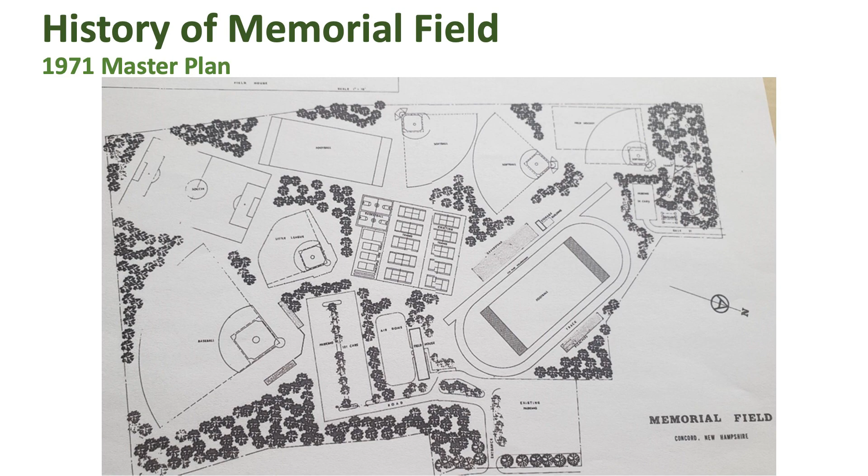In 1971, if you do the next slide, we did a master plan. Most of this master plan was started right after this, the city started acquiring some lots. The state gave us property, and we also got a land and water conservation grant to begin building out.

One thing I think is interesting to note, there's a parking lot down here where the band field is. There was a domed air bubble, pretty ahead of the game. Over here is a lacrosse field, but the track, baseball, some of the soccer and the football, different orientations, but a lot of it is there.

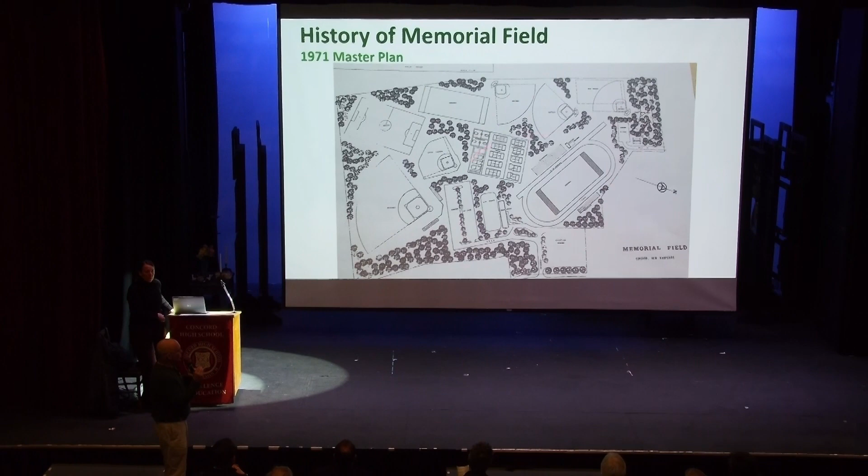So in 1971, they did a great job of planning ahead. I think we all know Memorial Field today. It is the main sporting location for Concord School District, for the high school. We do have a lot of youth and adult leagues that use it when the high school's not using it.

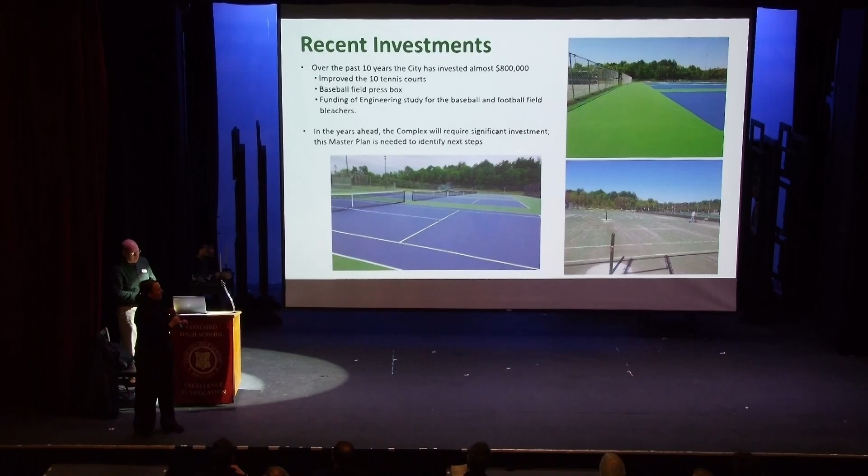So some of the things that we've done since 1971, it's aging. People born in '71 have already celebrated their 50th birthdays, so Memorial Field is pretty much ready for some upgrades. Some things that we have done is invested almost $800,000 to improve tennis courts, press box, and then doing some engineering studies to understand what the issues are out there and that need to be fixed.

Understanding through those studies that a lot more has to happen to bring this up to current standards. So that's why we're doing this master plan, to start planning out what we can do and what we need to pay for to do.

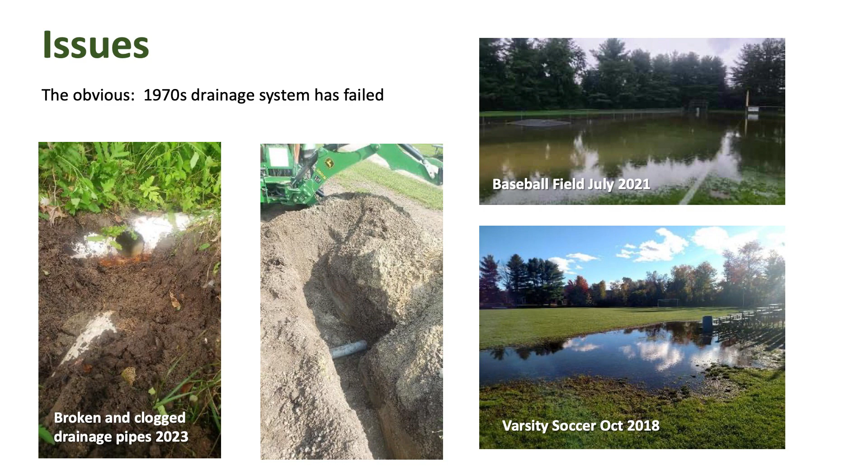So drainage, as David mentioned, is one of the biggest issues that we have out there. There's a lot of standing water, which makes the fields unusable. We've done some investigations just to look at the underground drainage, and they're clogged, they're blocked, they've been there for 50 years, so it's time to upgrade those to help address those issues. Next slide.

Yep, so just looking at the 1971 expansion, you can see this depression here, that's where those pipes are, and they're starting to collapse. So it's causing not only drainage issues, but trip hazards and other issues with the fields.

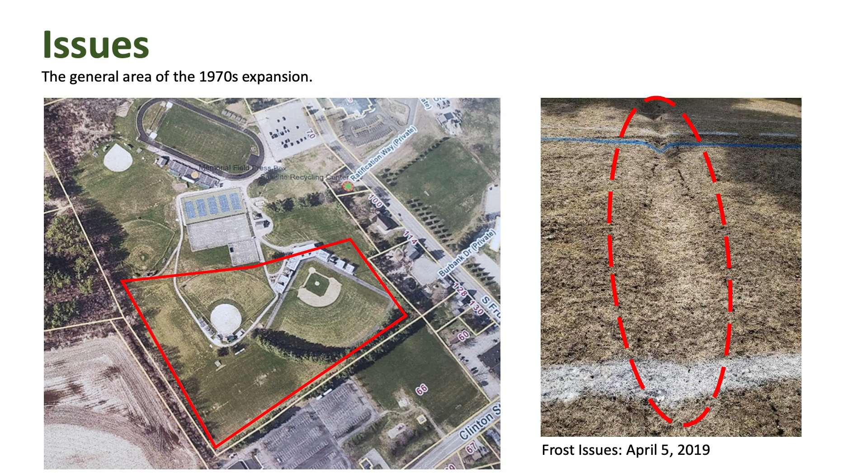So pretty much we've started, staff went through our understanding of what the issues are out there. The 1970s complex did not anticipate the needs of sports today. So that's one of the things we're trying to upgrade, to bring them up to regulation and to host different types of events that can't currently happen there. When the track is used for track meets, you can't have other games happening at the same time, so there's schedule conflicts. The track needs to be replaced, the bleachers need to be replaced. There's been talks about whether or not to make it an artificial turf field versus grass fields. There's parking challenges, there's accessibility challenges. So there's a lot of things that we need to address.

So the things we're focusing on as we move forward with the concept plans you'll see tonight are addressing those drainage issues, addressing parking, getting better lights out there that work, accessibility, bleachers, replacing the track, adding locker rooms and updated bathrooms, moving the fields outside the track for concurrent use, turf fields. We did not reach a consensus on that at the last meeting, so it's still out there as an option. And then adding walking trails and cross-country ski trails.

So this is not only from the public meeting that we had, but also there were focus groups hosted with high school students and middle school students.

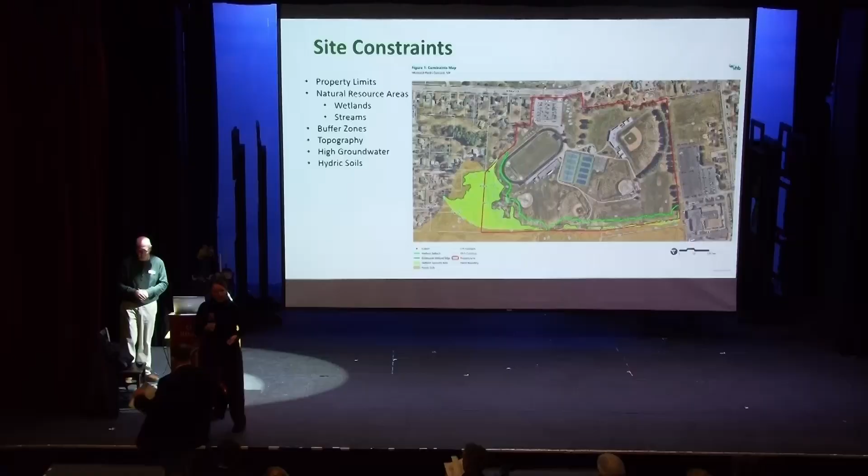So I'm gonna now pass it over to our consultants from VHB. We have Eric Girard here tonight, and he will bring you through their study.

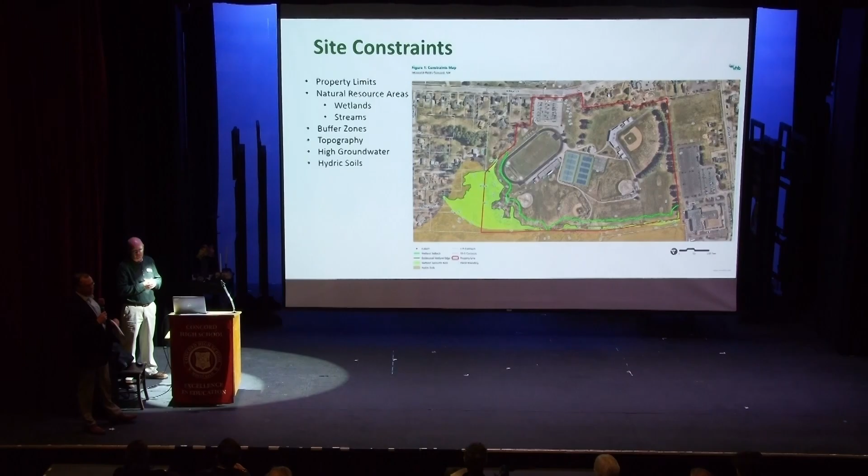Thank you, Beth. Thank you, David. My name is Eric Girard. I'm a civil engineer with VHB. And we've been working on this project essentially since July of 2023 to start our initial investigations to understand, really dig in and understand what's going on at Memorial Field.

So we started with an existing conditions site survey, understanding property bounds, knowing where the site limitations are, moving into identifying the wetland resources, identifying what those constraints will be, where we can or cannot expand or do work. Similarly, there's buffer zones and regulatory requirements associated with those areas.

Additionally, we engaged a geotechnical engineer to do borings to understand the soils, subsurface soils, and groundwater. Those results came back with very elevated levels of groundwater, 2-3 feet below the ground surface, which is why you're experiencing all these drainage issues out there. Additionally, topography - understanding the slope of the land and what we can and cannot do out there when looking at future development opportunities.

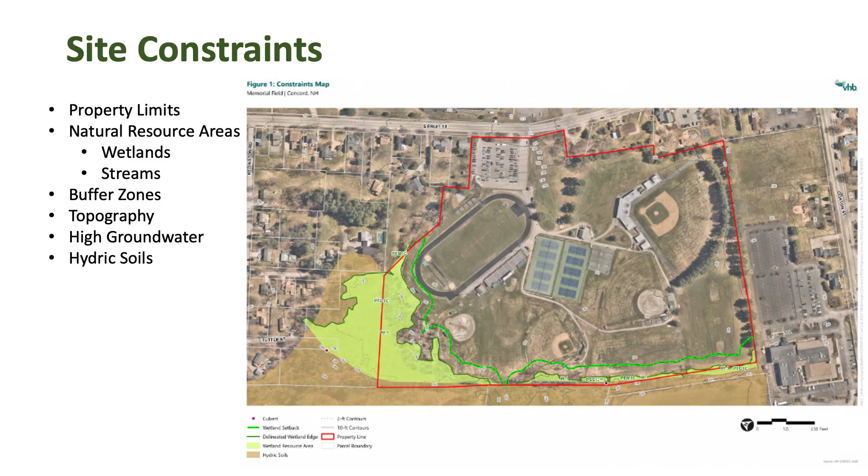And I'd like to turn it over to Chris now to run through the development programs. Thanks, Eric.

Good evening everybody, my name is Chris Huntress. I'm with Huntress Sports - we're landscape architects and planners. We specialize in the design and construction of recreation and athletic facilities.

So we were here for the listening session, and before I present the drawings that we're going to look over, this being one of them, I just want everyone to remember we're at the master plan level. What we're trying to show tonight and in the plans we've developed to date are really what's possible - have we thought of everything? Some things that we're going to show, I think, work quite well. Some things may need some additional thought. But what I want to take you through first is...

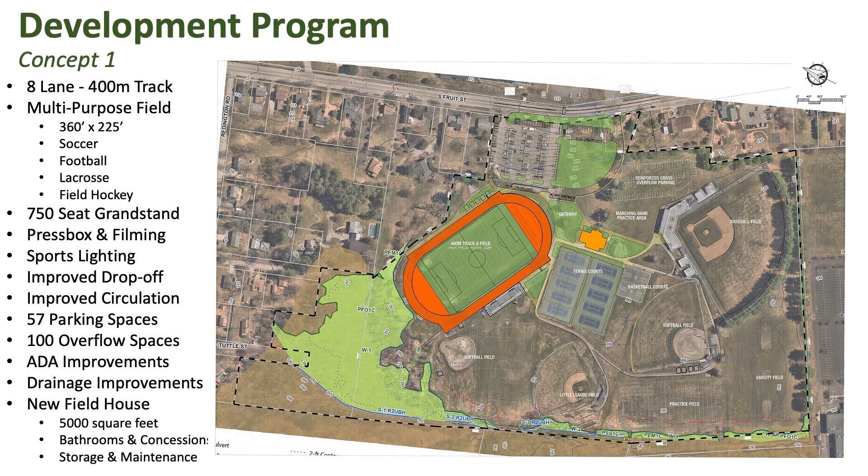You have that laser pointer - this is what we called Concept One development program. When we were here last time, we heard quite clearly that an 8-lane, 400-meter track would be desired, that the field within that track should be wide enough to accommodate multiple sports, not just football, but widen it out for a full-size soccer field, which once I get to soccer width at 75 yards, I can accommodate lacrosse, field hockey, every other sport within that dimension.

The seating could come down on the track and field, and things like a second field could be developed that wouldn't be within the track. So let me walk you through this program a little bit here.

What this plan shows - this is South Fruit Street up here, and this is your existing parking. We've expanded the existing parking to move westerly down towards the track, to put a bus drop-off in this area, and we've continued a new access road around this slope that would come out opposite Industrial Drive to improve the parking and circulation you've got up there now. This secondary entrance and exit is off-centered from the center line of Industrial Drive, and I think that doesn't allow this parking lot to be as efficient as it could be.

So we wanted to see if we could improve circulation and expand some of the parking. This new lot accommodates 57 more parking spaces than we have now. Again, we take this access drive and put it on the same center line as Industrial Drive. That allows for bus drop-off and pickup here, and also bus parking right up in this area too, so that when there are major events with multiple sports and multiple teams, there are places for them to go.

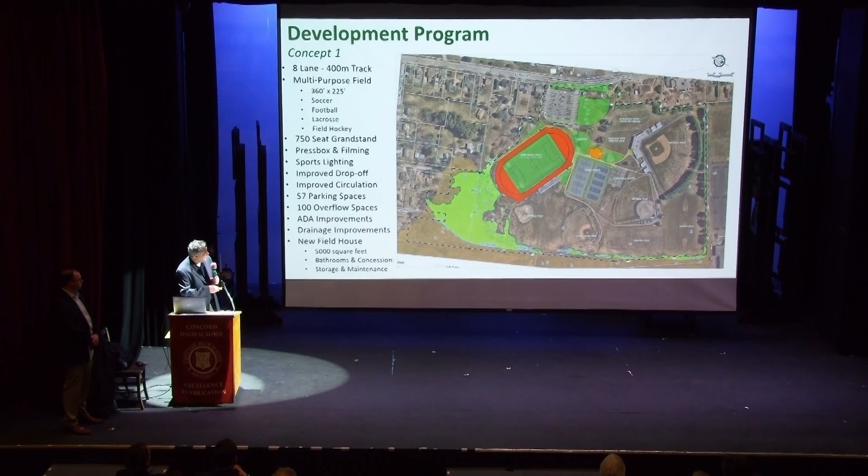The other desire we had, or were asked to accommodate, would be a new field house building - that's what this orange block is here, a 5,000 square foot building which would accommodate concessions, bathrooms, storage, and maintenance areas, and be a significantly larger building than what you have now. It would be in what I consider the central area of the park, so that it would serve not just the track and field, but all the baseball and all the surrounding facilities around that.

Let me see if I've left anything off here. I think on top of all this, as we did this design, we looked at things like ADA accessibility for handicapped individuals, and working with Eric and his team, drainage improvements and grading, and how it would blend into the site. So I'm very comfortable with the plan and the program we've got, that we can make that work.

We do have extra parking. Thank you, Dave. One of the other things we looked at was the possibility of expanding parking, understanding that parking on this site is tight. And as we saw in the original plan, there was a parking lot in this area.

We're showing reinforced grass parking over here, which would remain a grass field. It would be used by the marching band and could be used by anybody as a grass surface, but could also accommodate about 100 cars when there was an overflow or a need for it. That would roughly be within this area and stay off the baseball field as well.

So the access to that would be off of this new loop drive that would come in, and you'd come down here and into that location. I think the next slide is going to be yours, Eric.

Did I do the wrong one? Oh, there we go.

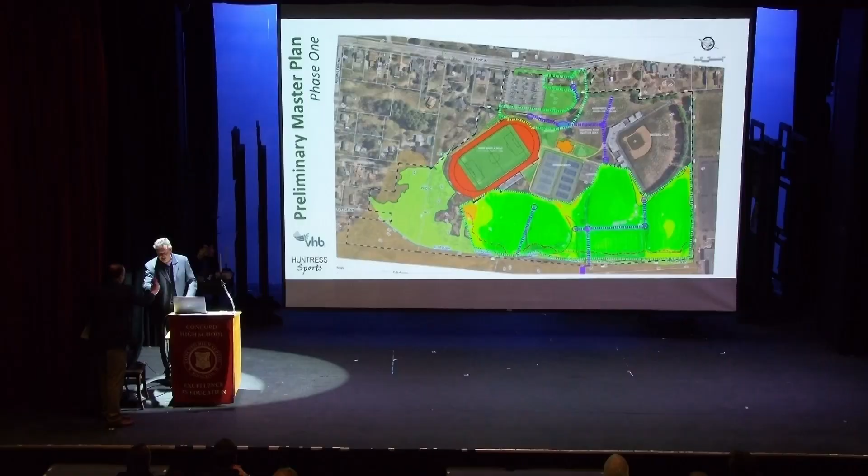Thank you. In looking at this Phase 1 program, understanding drainage and playability on these fields is a major concern. During these wet times, a lot of the fields become unusable, not very good to play on, and unsafe. As we look at how to improve drainage with the groundwater so high, those areas need to be lifted in grade.

We're looking at raising the grades up about 2 to 3 feet in those lower fields. That will allow us to get in a proper drainage system, under drains, connecting throughout. Those are the blue lines you see up there, a conceptual idea of where we'd be collecting some low points and ultimately draining out.

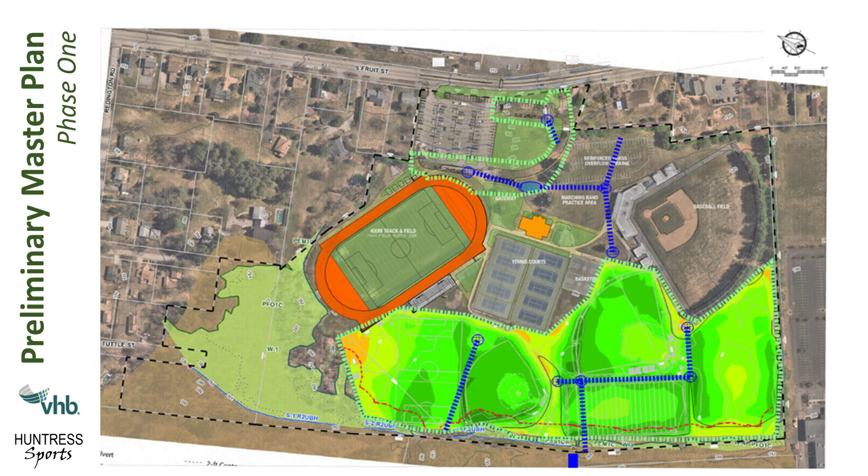There's the blue dot on the bottom here. There's a collapsed culvert out there today, so part of these improvements would be fixing that large culvert. It's on the state property, but we believe that area is also causing some of the flooding during larger storm events. The water just has nowhere to go, it's getting blocked by that. So opening that up will help, and raising these grades allows us to get in drainage as well as properly sloping the grade to surface drain as well.

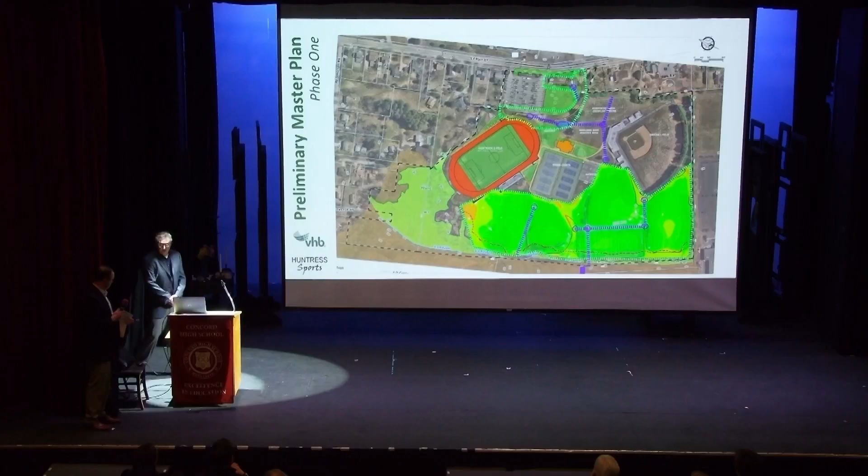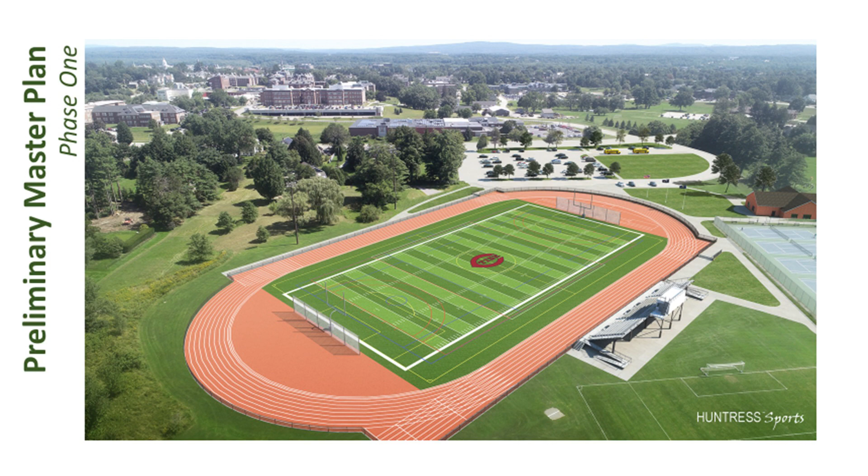The bleachers have been reduced in size to approximately 750 seats. Part of that is based on feedback we got last time about how many seats we really need, but the other part is the reality of expanding this track and field program without impinging upon the tennis courts and surrounding facilities. We cannot accommodate a 2,000 seat bleacher here the way you had presently, so we've brought this down to a size that best fits and would serve most needs, understanding there would be certain events that are a little bit larger.

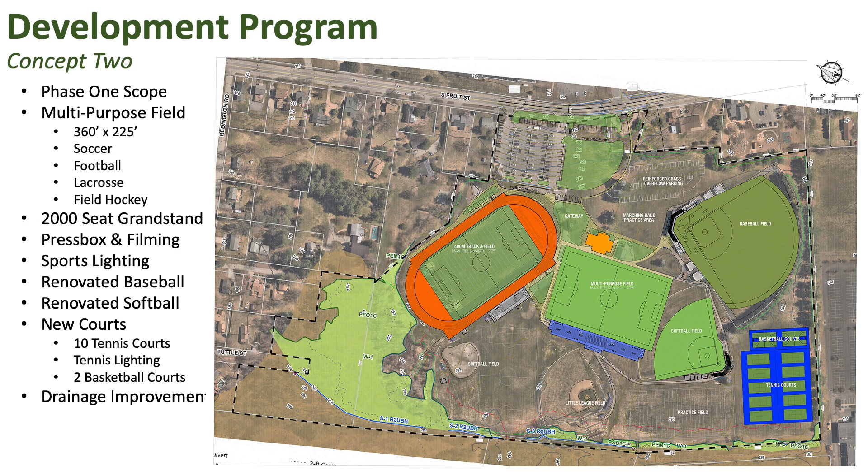This slide starts to look at some of the questions, some of the discussion about - so everything you see in Phase 1 that we talked about is accommodated here in this Concept 2 plan. The track and field, same size, the grandstands are the same size.

Really what we've done is take to heart the comment of, can we get a field that's not within the track and field, so you could separate some of the sports and opportunities for play and accommodate a larger grandstand. We did about 6 different versions of this plan to try and fit what would work. The only place that opportunity exists is in the center of the site, just to the west of the existing building, which is the location of your tennis courts. So we wanted to see what fit and what was possible here.

This shows a full-size multi-purpose field that would be large enough for any high school sport or even collegiate sport, full 75 yards across, 120 yards in length, with runoff areas and team areas, and a full 2,000-seat bleacher and press box here. This would be in close proximity to the new field house building, and really become the centerpiece of this facility.

It would likely be eligible for hosting major events, statewide events, certainly citywide events, but major events at a state level as well. As we start to look at how the other improvements blend into the rest of the park, the baseball field could be renovated in place with new bleachers in the back.

We have pulled the baseline in a little bit. You've got a rather large baseball field down there, particularly around the infield, so we pulled the infield in a little toward the bleachers. And we've pulled the right and left field foul lines in, because right now they're longer than they need to be, and expanded center field a little, so you've got now a traditionally sized baseball field in that same footprint as before, and that would be improved.

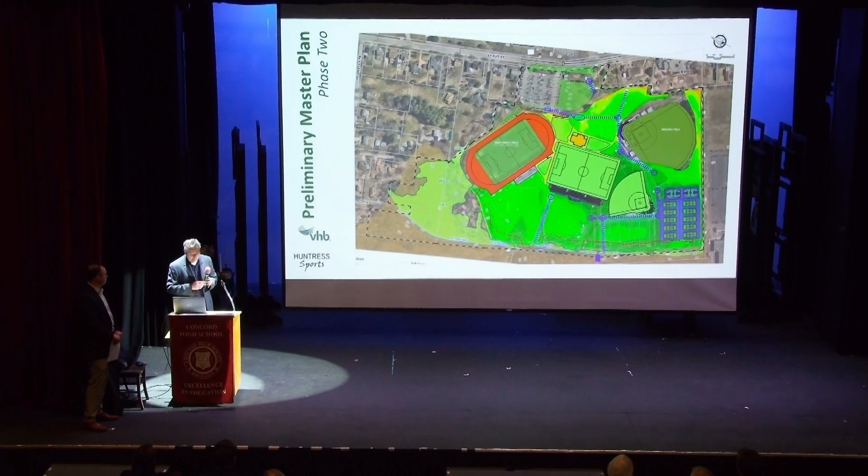This is very similar to the previous slide. Raising those lower grades 2 to 3 feet, drainage improvements, and as Chris mentioned, there's definitely more of an opportunity where we can look for more subsurface detention, even potential infiltration opportunities if we keep it shallow, which will help the playability of the lower fields and adequately get that water away. Overall similar improvements as before, same with the parking area, complying with regulations to detain and treat the water that will go through the state permitting process.

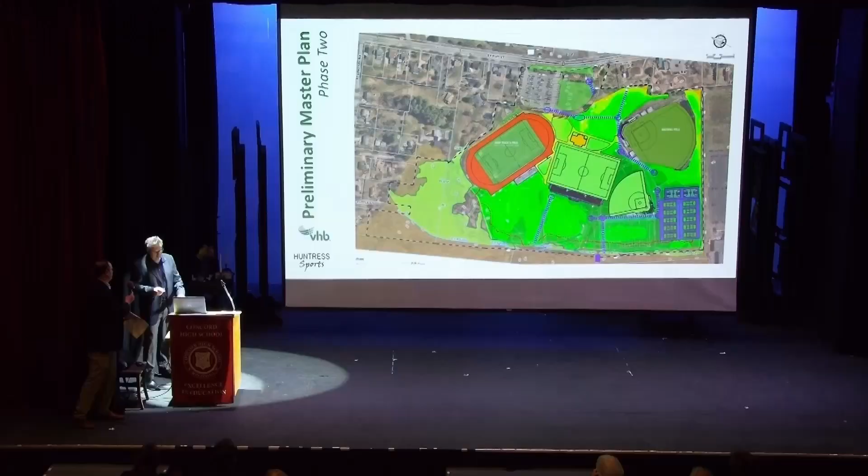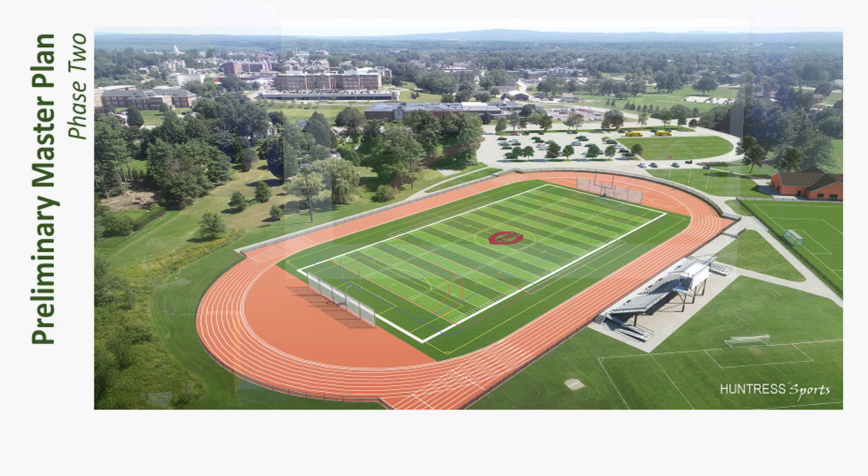This slide is very similar to the last one. The only real difference is that where the tennis courts were before, you can now see how the athletic field would be situated here. You can also start to get a glimpse of the new field house building up here at a gateway. As it would come in off the parking in your arrival, you'd be brought right into that centerpiece of the new facility.

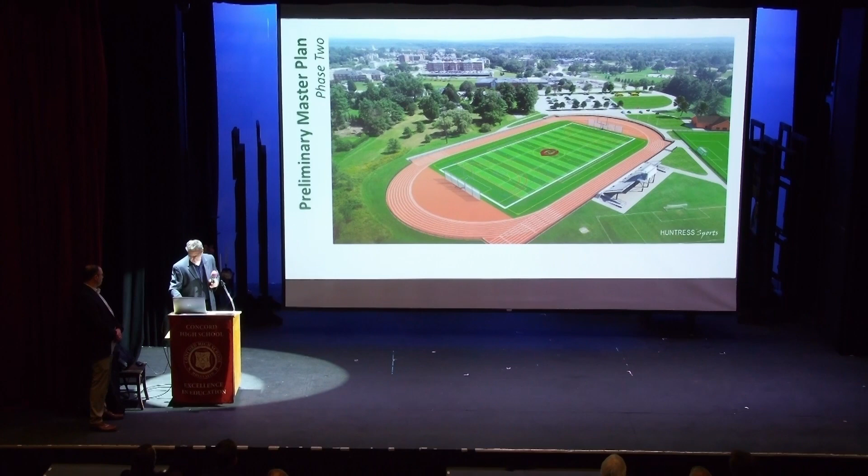And with that, we will open it up for discussion and questions.

Okay, are these on? I will let Beth and Dave call on folks, and Eric and I will answer the questions. What's that? That's okay. I know, it keeps rolling down. I'll pass it back to him.

For the 2,000 person bleachers on the new turf field that's not near the track, does it make sense to put the press box on the other side so the noise goes away from the neighborhood and heads out towards Langley, or is that not a concern? Or does it not fit? I'm sorry, you just want to move the press box or the whole bleacher? Well, I guess however the sound system would be, so that it would go towards that farmland. I don't live on that side, it doesn't bother me, but I don't know if it bothers the neighborhood with the sound coming out.

So it's a great question. Certainly the sound system is going to make some noise regardless of all the things we can do to it, but we can angle those speakers. Where the control happens, whether the press box is on the east side or the west side, is probably not as much an impact as how we angle those speakers and how many we turn on at a time. A facility like this, with the multi-purpose field in the middle, would probably have anywhere between 8 and 12 speakers oriented around the field in different areas. We could turn on one side and not the other, or turn on half of them. We could also put an upper limit on the volume so that if somebody's controlling it, they can't get over a certain decibel level. So those are all control things we could build into a sound system as we go forward.

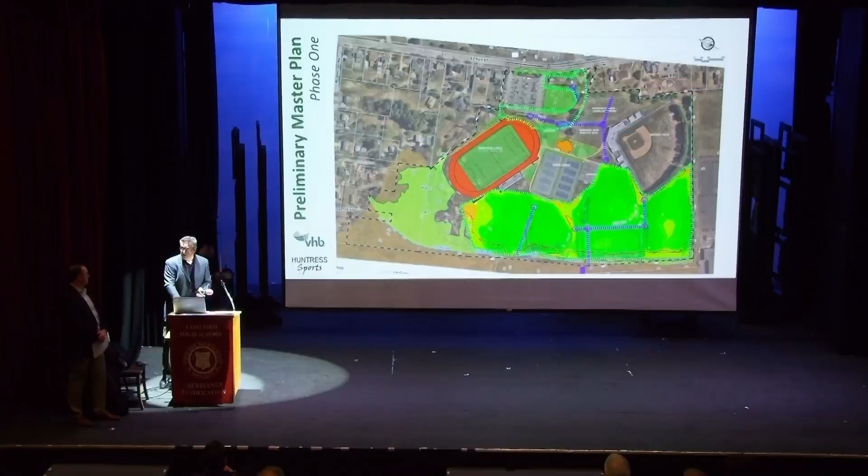How much is concept 2 going to cost? Concept 1, my bad, concept 1. I'm sorry, can you repeat the question? How much will this one cost? 10 million? No, phase 1 would be in the range of 10 million. A project of this scale and size, we're still working out the range of magnitude. A lot of decisions have to be made regarding surfacing, drainage, and other things.

But the range is anywhere from 10 million for phase 1 up to, for a full build out, somewhere north of $20 million if you did everything all at one time.

Do you think the facilities will be able to host major events such as Meet of Champions or New England's for track meets? I do. The track and field could certainly host, with 8 lanes and double straights, even national events and Olympic qualifiers on a track of that size. And with 2,000 seats on the main field, you could accommodate larger regional events as well.

Do you think there's enough parking? It's an excellent question. Do we have an overall parking slide, that regional one? Okay. And then last question, do you think there would be enough revenue from larger meets and other events to sustain the facilities?

Great questions. I'll tackle the parking discussion. The existing parking lot up there today has about 125 spaces. We're adding another 57 or so, and then an additional 100 as overflow. During peak events, everyone knows it's underparked. We're adding what we can, but during these peak events there's still probably going to be a couple hundred spaces short. There's an additional 130 or so parallel parking spaces on Fruit Street, and even overflow at certain times on the state properties.

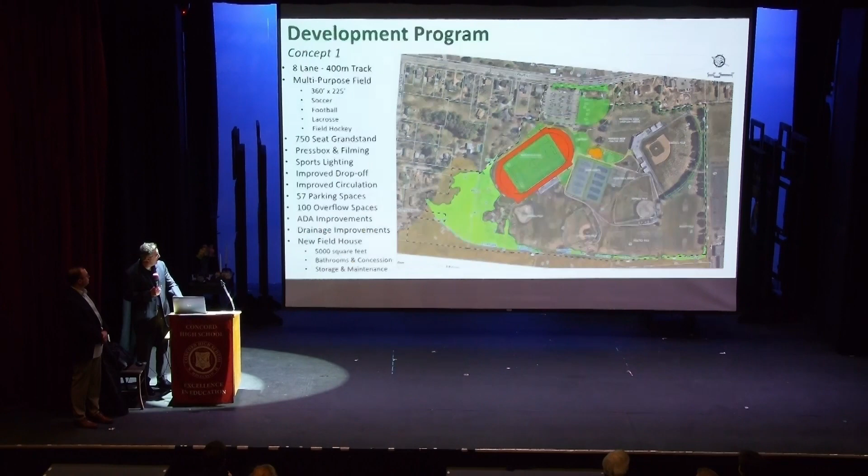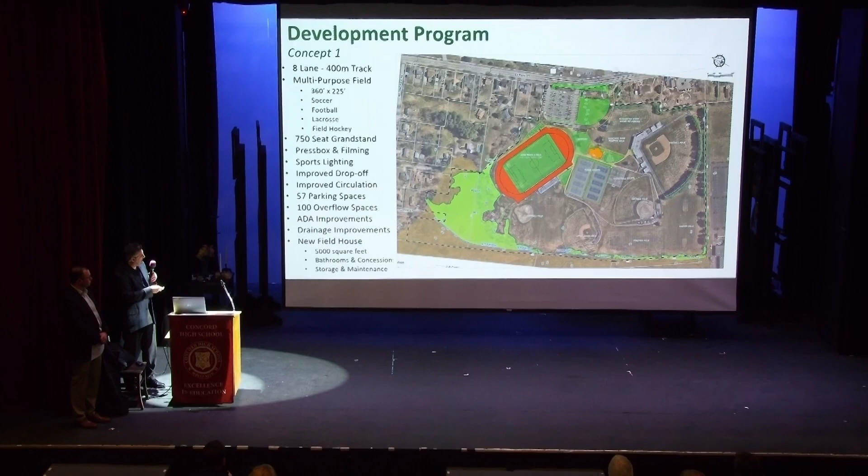So the written description of everything that's in this first phase, or this first concept, is here, but you can see it graphically on the plan. I would expect that the parking lot improvements would occur, the reconfiguration of the track and field along with the 750-seat bleacher would occur here, and the field house and walkway connections, kind of gateway walkway connections.

It was important to us as we were laying this out that we recognize whatever investment you made early on would not have to be undone as you did a later phase, so that you could start the drainage improvements throughout these areas, and then tie into them as we get into the later phases. So everything you see on this drawing is what I'm calling phase one, understanding that you can choose to do more or less in what might be your first phase.

But this we could fit in and comfortably know that we could leave the tennis courts in place here, we could leave the basketball courts in place, and we could still accommodate that first part of the program.

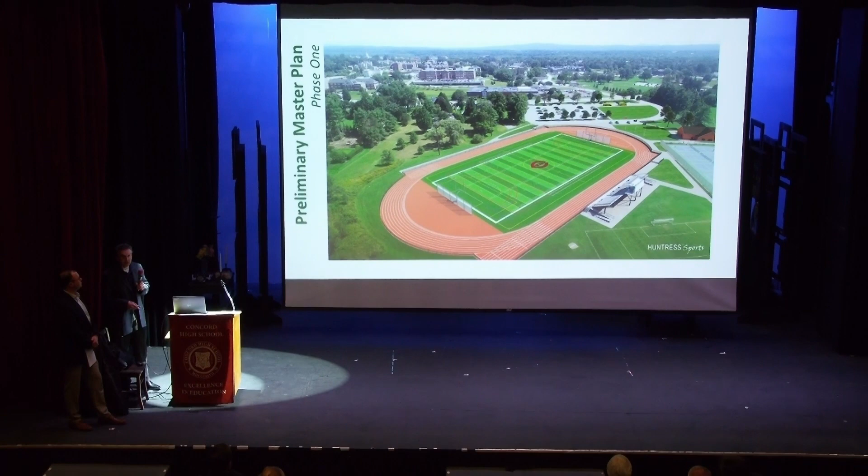And there are sports that are dictated by the surface, that being field hockey. Enough with the grass field for field hockey—that was a 1972 sport thing, but the sport has evolved. It's a lot quicker, more accurate, and actually safer to be played on a turf field. So turf is a necessity, and other sports it's nice to have, but for field hockey it's a necessity. So don't forget about the field hockey players and the field, because right now we're completely off-site, and I would love to see us brought on-site to be played with our other school sports.

Thank you, your comments are well taken. Field hockey is the one sport that really does benefit from turf. They all benefit to some extent from turf, but field hockey more so than others, just because of the way the game is played. We've designed field hockey fields used all the way from the national level down to secondary school use. Both of these fields could accommodate field hockey. If you choose to make one of them turf, that would be a better location for field hockey, but both of them certainly can accommodate the fields.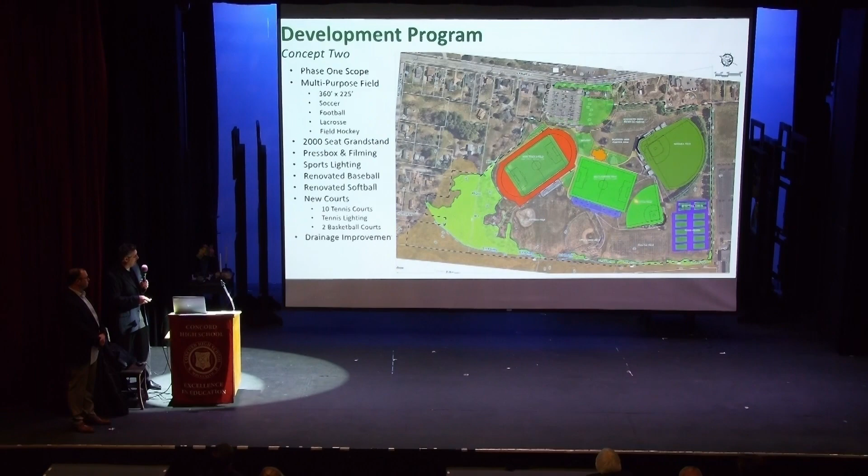The question about overlap in some of the areas, particularly here with softball as it plays towards this multi-purpose field—this is a full 225-foot radius, so range for softball can be anywhere from about 190 out to 225. We've shown this with as large a foul line or home run line as available, but space is tight, so there will be times when a really well-hit softball could get out into this field. We'd have safety netting along the back end of the multi-purpose field to limit that and protect those players.

You're welcome. Any more questions?

I don't know if there's anyone here that can speak to this, but piggybacking on the point of the teams that are currently completely off-site, at Rundlett, at Rollins, across Fruit Street at the State Hospital Complex, is there a thought that this would increase capacity so that some of those teams could be brought on site here? You're talking about all sports across the board?

I'm just wondering about increased capacity, especially if our fields at Rundlett are potentially going away in the near future. I think the good thing about a turf field is it does add capacity. Right now, the turf field could be open—we didn't have much of a winter. When you look at Rundlett sports, a lot of times high school teams are practicing on that backfield, and that's almost as hard as cement. So depending on what happens, if the school district builds more fields for the new middle school over in Broken Ground, that's one option. But if a turf field is here, we'll definitely be able to add capacity. It's just up to the community how we want to use that extra capacity.

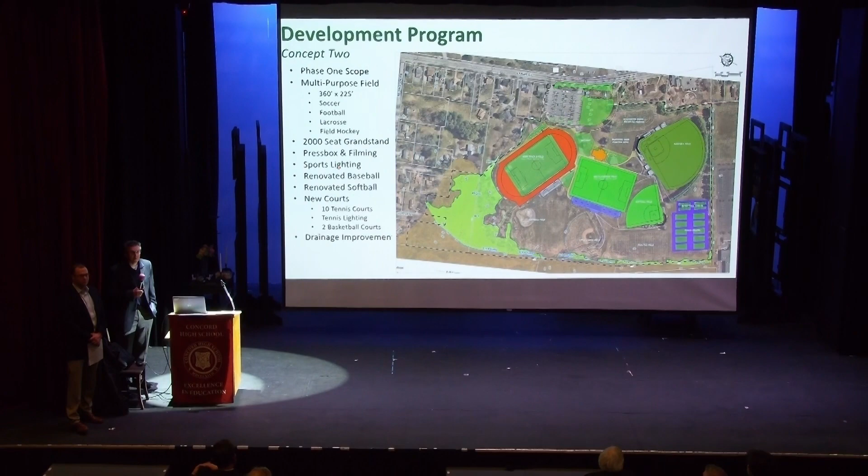I'm sure you guys thought of this, for that big middle multi-purpose field, will there be floodlights for that surface as well? The opportunity is there certainly to put sports lights on that field, yes. And yes, anybody who's gone down to Bedford and seen the multicolored lights and stuff, we'll be doing the same thing.

Multicolored lights.

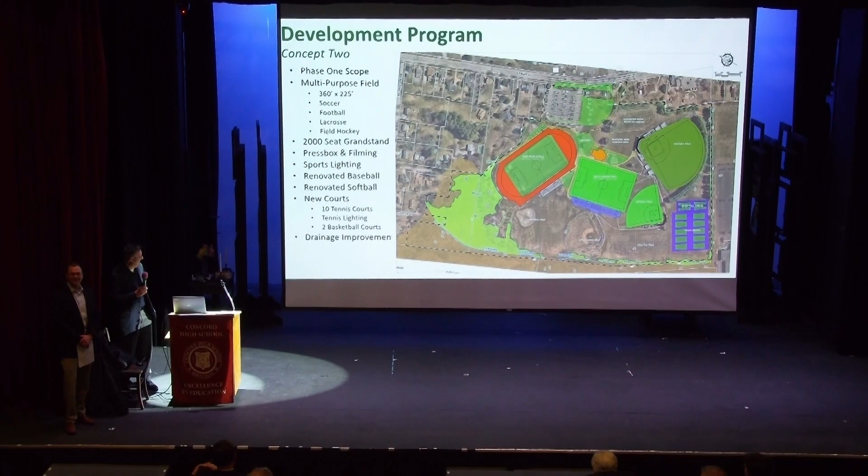Any other questions? Thoughts? On behalf of the city and the school district, I appreciate you all coming. What I'm hearing is continue to move forward with the master planning process. I'm also hearing when we go to City Council and the Concord School District for an update, I would encourage you all to be there again, because ultimately they're the decision makers on how we move forward, and they look at the taxes and everything else. We'll publicize that meeting when we get there.

We are going to fine tune the final cost estimates. We also have to get a cost estimate for the next phase, which would be design and permitting. Again, that's up to City Council and the school district. Hopefully we do it together, but that's up to them. We also have to present to City Council and Concord School to hopefully review and get hopeful approval of the plan, because we need both of those groups to agree on where we want to go. We'll publicize that as we get going. It's probably a couple months away, but we'll let you all know.